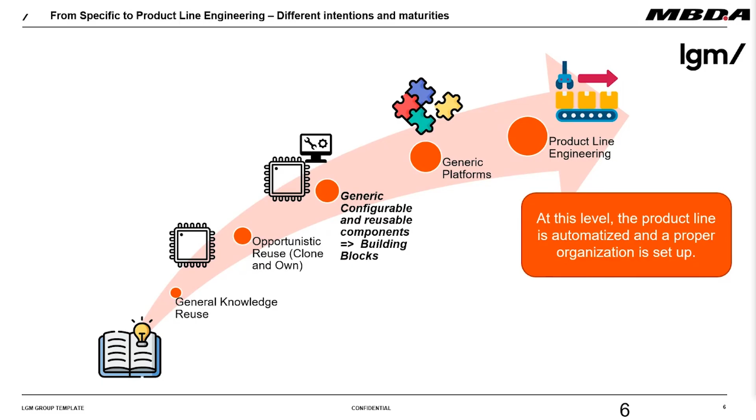So this leads us to the current situation. We want to get to configurable reuse of building blocks with a lot of governance around it. This is what we are introducing currently for MBSE parts only. The next step will be to do this for all development domains, and finally we will have the entire product line engineering approach, which is an end-to-end approach.

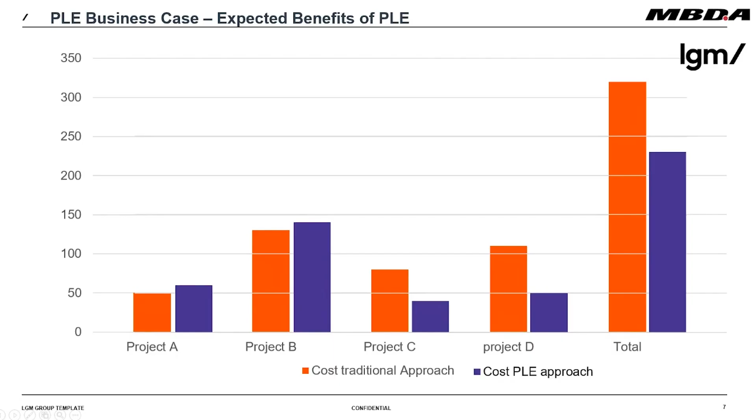So why will product line engineering help us to reduce our costs? This is a small chart. If you compare different products A to D, and you sum up all these costs to a total amount, you see the big square of this cost. So it's really a tremendous amount of money. If we are doing product line engineering, then you see for the first two projects, we spend the same amount of money plus a little bit. The plus a little bit is establishing the product line engineering artifacts, methods and processes. So it will take a little bit more cost and time for the first two projects.

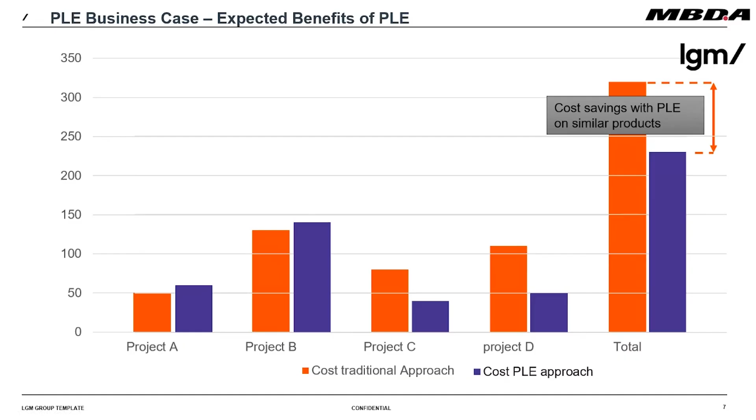But then after the third one, you see a dramatic reduction of your cost as well as of the lead time due to the reuse of the products or building blocks. And so over time, you will get more and more reduction of costs once you establish more products of the product line family. Yeah, this is the way it works.

So in general, we need to understand the customer needs, and of course, one of the new steps is to get the features which need to be created for a new product. This leads to a feature catalog, and this is the preliminary work we have to do in the first two programs, to create such a feature catalog, which is the abstract description of our product family.

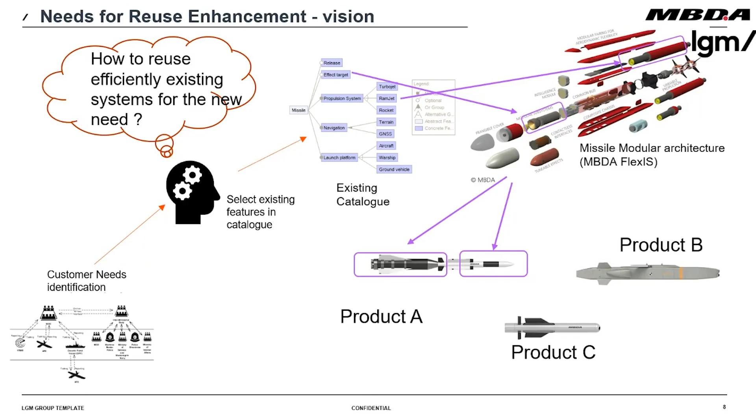To get a little bit more background, this is not something we established by ourselves. Luckily, a couple of years ago a new standard came out, the ISO 26580, the feature-based product line engineering for software and systems. This is exactly what we were waiting for, because feature-based development has been one of our key philosophies for a couple of years already, but we didn't have any governance around it, and here the standard brings us the governance.

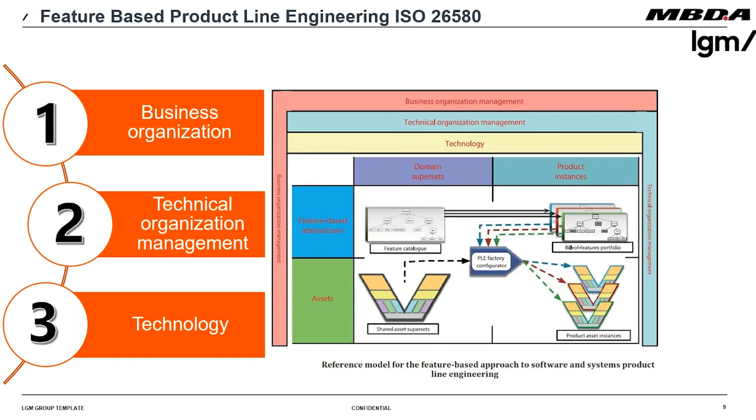The standard describes 3 different pillars: the business organization, the technical organization management, and the technology itself. During the greater engineering transformation, we concentrated on the technology only, to get hands on the technique, on processes, methods, and so on. But now, beginning of next year, we are jumping to the business as well.

Here, this is the middle area in a little bit more detail. You see here the feature catalogue in the top left corner. This is the description of the abstract feature catalogue I explained before. It's really free of any technology knowledge, it's just problem domain information for this configuration process.

Below, we have the shared asset superset, where you recognize the V. We are working with the V model as a development cycle, and the V model contains different steps of activities, and each of these activities produces artifacts. These artifacts are called the 150% artifacts. The important thing is that we are connecting each feature to its corresponding artifacts in the shared asset superset. So once we want to grab one feature out of the feature catalog, then we have everything connected to it. This helps us later on to create automatic configurations.

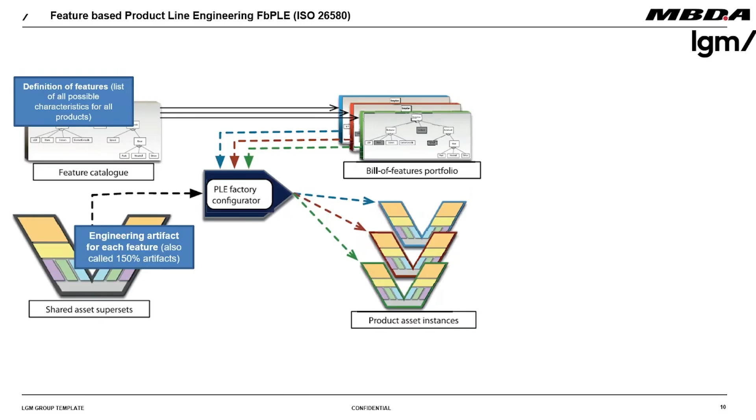Next, we are going to the configuration, the configuration of a new product. You see here in the picture 3 different products, green, red, and blue, and each of these products has its own configuration. If you take a closer look at the picture, you see some grayed out elements, which is an indication that this feature is not included in this product. Other products have another combination of this kind of feature.

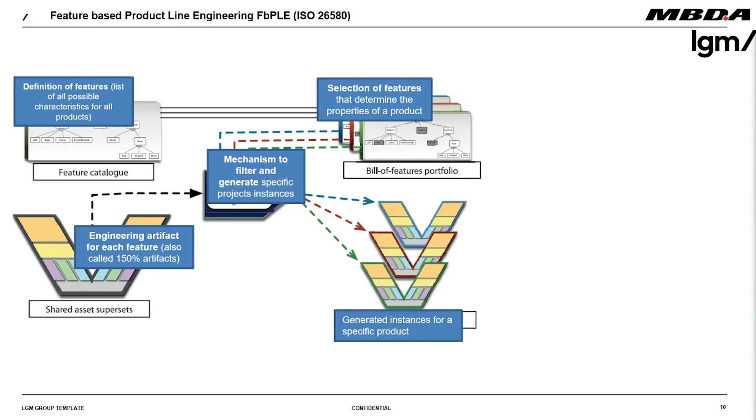This is then the input to the real magic in product line engineering, because it comes with an automatic generation mechanism, which reads in the specific configuration with the bill of feature, and extracts out of the engineering artifacts the elements which belong to this specific product. This creates then again a smaller V, so you see a green, red, and blue small v as well. This is generated automatically by the configurator, and this is called the instance of a product.

A little bit of background: we have different working groups around the world. There's a French working group focusing on PLE, where Sébastien is also working with this group. There's also the International INCOSE working group for model-based PLE. The same working group is working on the new standard, the 26581, which deals with the configuration aspects of feature-based product line engineering.

Nevertheless, there is a book which describes product line, model-based product line engineering, as a holistic approach, and I'm a co-author of this book. So if you want a really deep dive into model-based product line engineering, then this is the best resource for it.

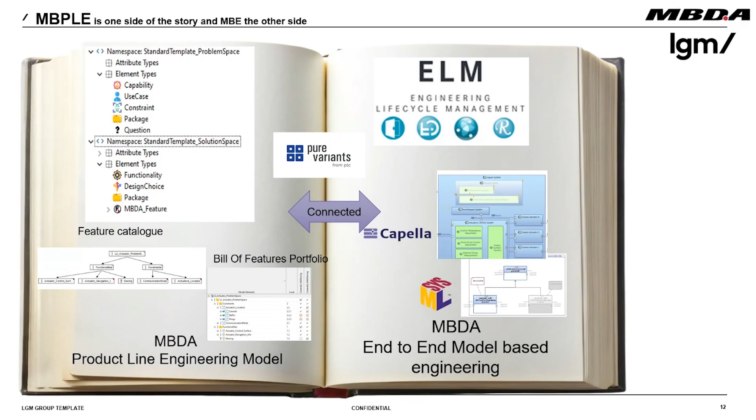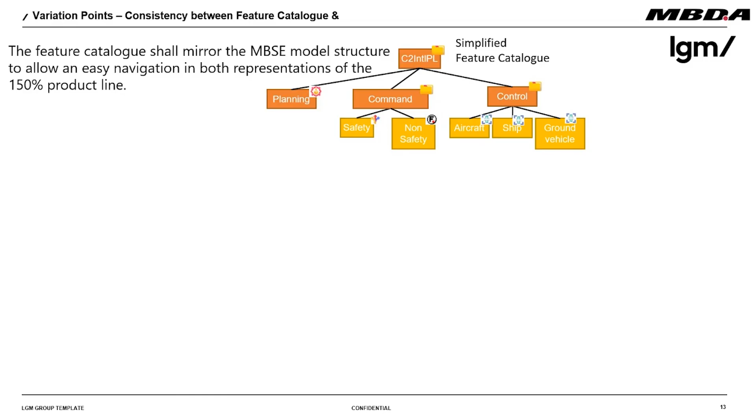And pure::variants is the glue logic between these two pages of interconnectivities. So the feature catalog, here a simple representation again of a feature catalog, just for illustration purpose. You will see this later on in the presentation.

So for doing this feature catalog, we need to connect those to the shared asset superset. And we decided to have two major variations of these variation points. The first one is the atomic variation point, which is almost a design choice.

So you have a design choice between two actuator systems. One is low power consumption, the other is high agility. So if you need to have such kind of a choice, for this purpose, we are providing this atomic variation point.

The second one is the starting variation point. Why it's called starting variation point? The starting variation point is always located at the top of our development pyramid. So you see this pyramid with the operational layer, functional layer, and structural layer.

So this variation point is located or is placed by the system engineer only on the top level, so in the operational architecture. So to avoid a handmade allocation of features, we decided to have a kind of automation.

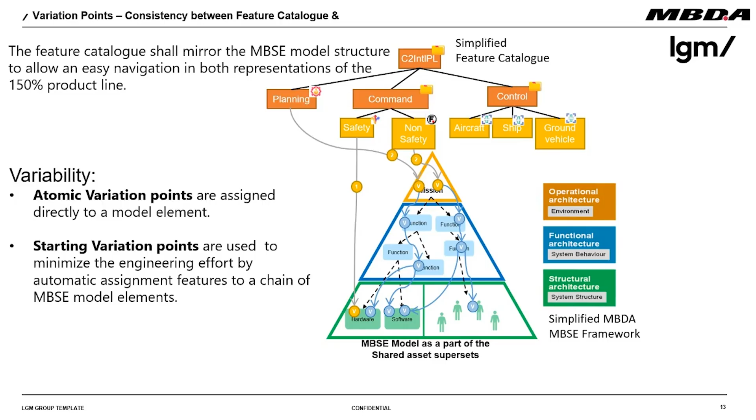So as Dieter mentioned, the MBDA MBSE framework is high level with three layers. It's agnostic somehow of the tools or language like SysML or Arcadia modeling language, and we mapped this concept to the Arcadia concepts. So you find again this well-known layers scheme from Arcadia, and so we have exactly the same concepts presented by Dieter, but propagated into the Arcadia layers following the traceability links that are established directly into the Capella model.

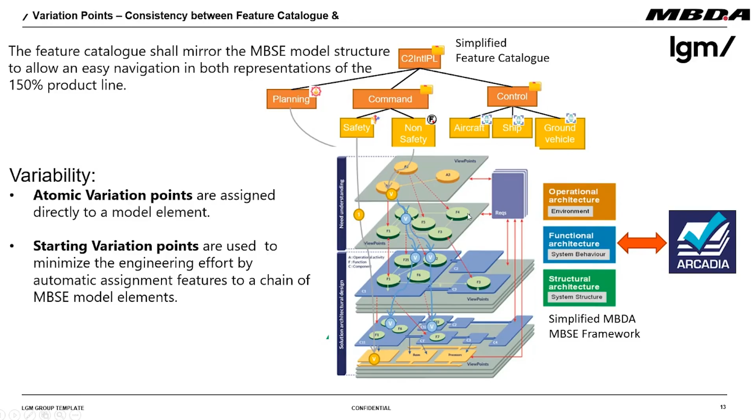So let's maybe jump directly to our example. So we first describe a really simplified, extremely simplified system, which is an actuator to control the direction and the movement. So we can visualize a simplified system architecture from a Capella model with a specific functional chain, which somehow describes a fictive feature called de-icing, to warm up the surface when we are at high altitude.

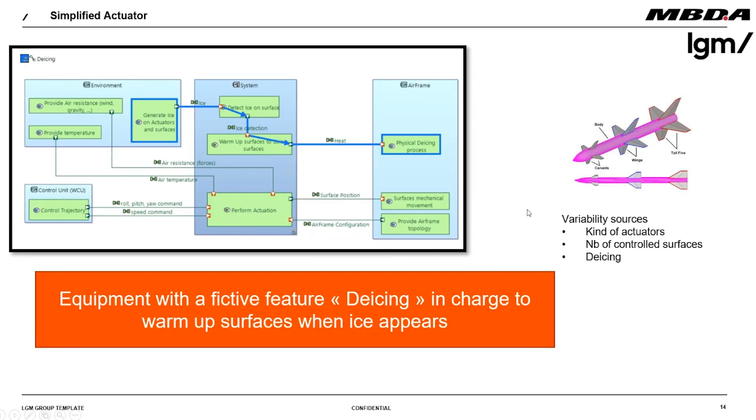And we will see how these variation points are defined using pure::variants and Capella. So first, we describe the atomic variation point. As mentioned by Dieter, this atomic point selects a specific design choice directly targeted on the physical architecture of the simplified actuator system.

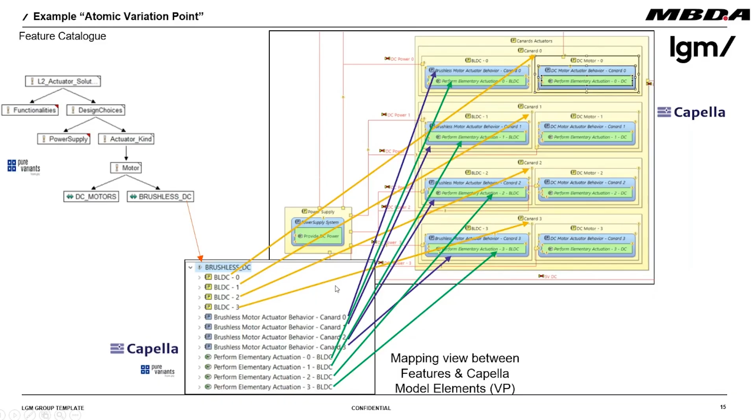Here it's related to the technology used for the motor, and here you have the feature catalog described in pure::variants, and in Capella you will have a kind of mapping between the feature catalog and the model elements in Capella. So it's provided by pure::variants features. And then you can see that the model elements associated with the variation points are directly referred here in the configuration of pure::variants.

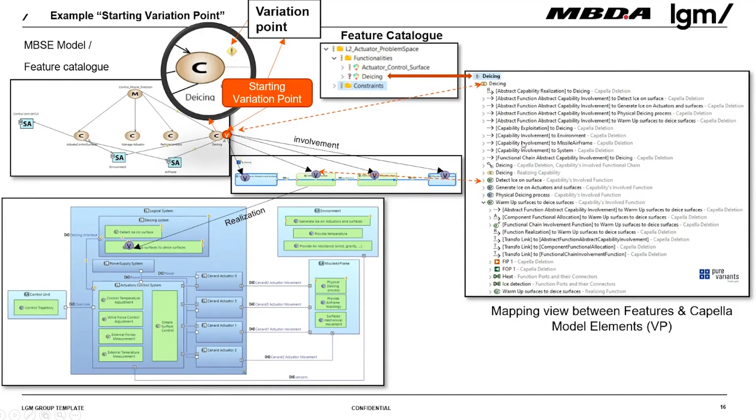So then you have a variation point which is propagated. I illustrate quite quickly the animation here, where you place the variation point at the capability level, and then it follows the traceability links into the Capella model, and this is described here, automatically computed by the pure::variants tool for the Capella layer, thanks to the Arcadia methodology. So this is for the simple variation points.

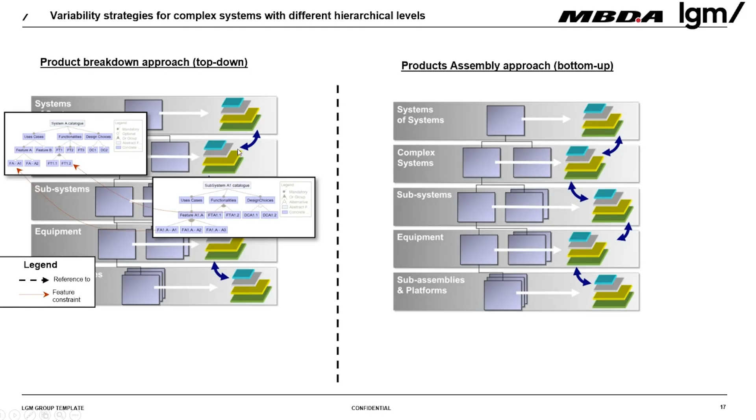You have basically two approaches. One is called the top-down approach breakdown, which follows the classical way to develop systems. So you have first the abstraction level, and then you go down to the next level.

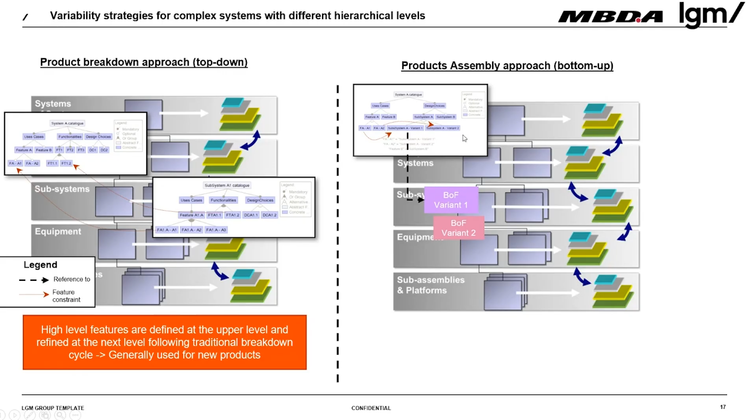For a new system, it's quite a common approach, but for existing systems, we used, and we will detail this more, what we call the products assembly, where the system level is somehow an integration of existing variants of existing products. So for this, we just illustrated here quickly this mechanism in pure variants, where you have the definition of what we called the selection of the product.

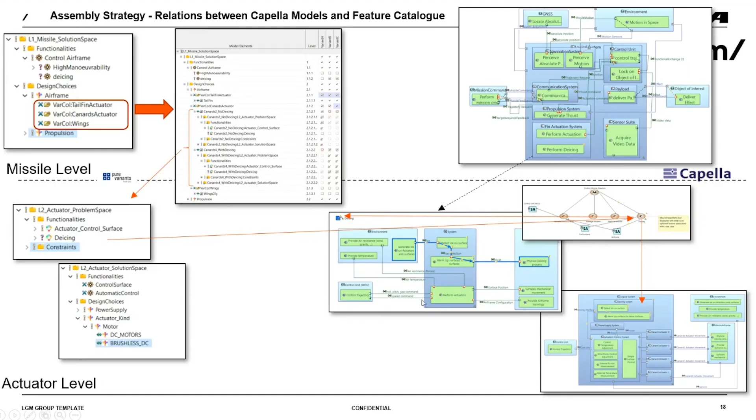So it's in pure variants called variant collections. And then this refers to existing configurations of specific subsystem actuator levels. And to go from the system to the subsystems, it's also possible to couple this with the common well-known approach called system to subsystem transition. So basically, it's this way that is proposed to assemble and to handle the complexity of different systems.

So the final slides describe what we have achieved during this greater engineering transformation. So we have created several guidelines on how to do product line engineering as a concept. Then we have guidelines for MBSE, specialized for Rhapsody, Capella, and DNG, DOORS Next Generation, as well as for the factory.

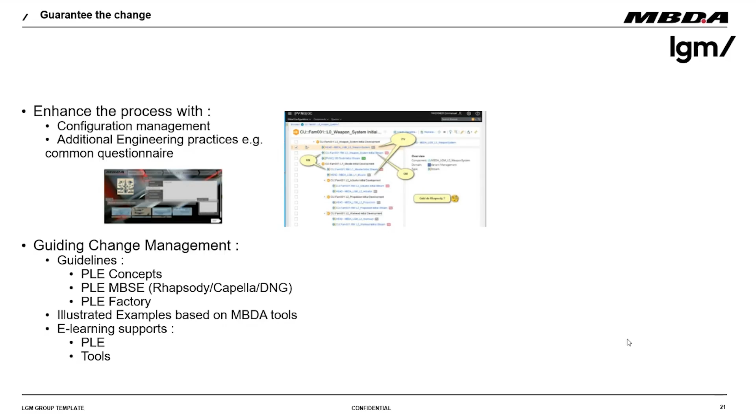Also, we have some illustrations, some sample models created as an international aspect. And we have also created some e-learnings so that people speed up a little bit faster.

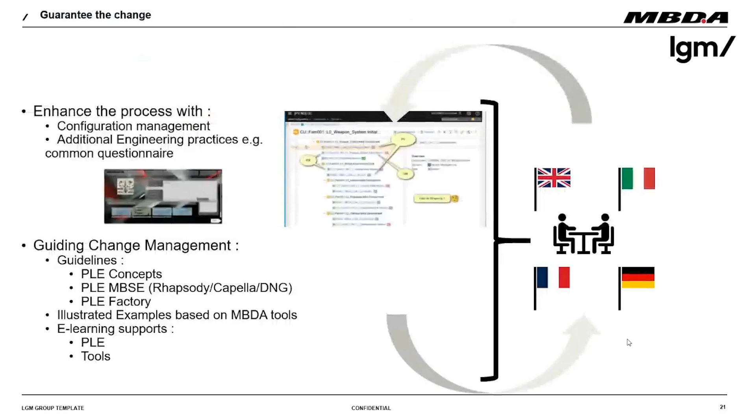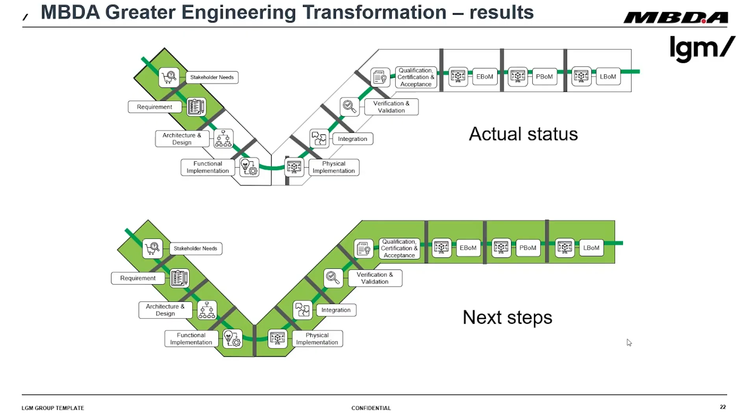And the next step, what we just started, will start next year, is to continue the journey for all the development things. So as a conclusion, model-based product line engineering is the key enabler to provide a strong governance. This is really the missing piece of what we have missed during the last couple of years, but with the new standard, we have everything in place.

So the setup of the PLE organization, processes, methods, and tools is quite straightforward. It's not easy to do because every company has its complex environment and everything needs to fit together. But it's good and handleable, so we are in good shape.

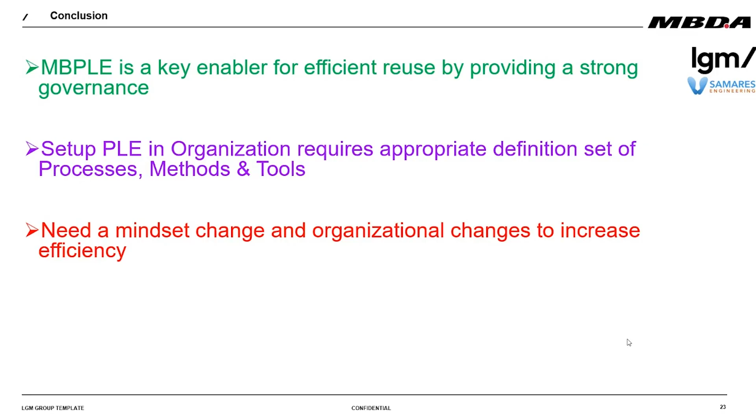But here the red one is really the most important thing. We need to have a change in mindset, an organizational change to enable really the configure-to-order philosophy in our company. So this is what we need to establish, this process of buying change. And nevertheless, configuration management becomes also a very important point.